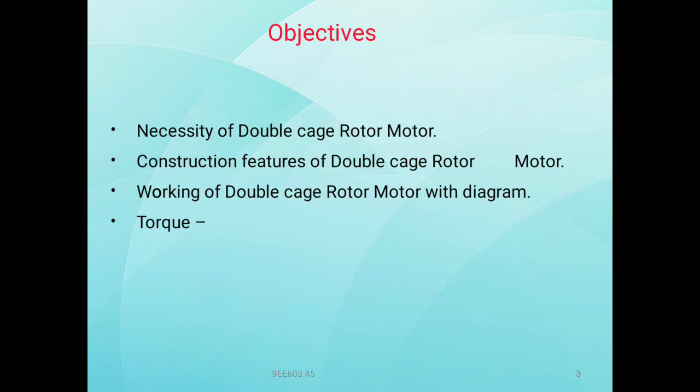The objectives are: necessity of double cage rotor motor, construction feature of double cage rotor motor, working of double cage rotor motor with diagram, torque slip characteristics of double cage rotor motor, and advantages of double cage rotor motor.

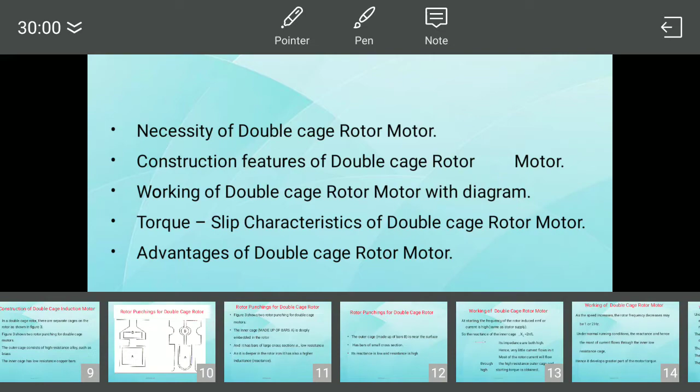Necessity of double cage rotor motor. The main disadvantage of squirrel cage induction motor is its poor starting torque, due to its lower rotor resistance.

So there is no way to insert external resistance as the winding is permanently short circuited.

So here the starting torque is poor, so we have to improve the starting torque. How can we improve the starting torque in squirrel cage motor? There is no way. There is no possibility to improve the starting torque in squirrel cage rotor motor.

So in single cage, in squirrel cage rotor motor, why is the winding permanently short circuited?

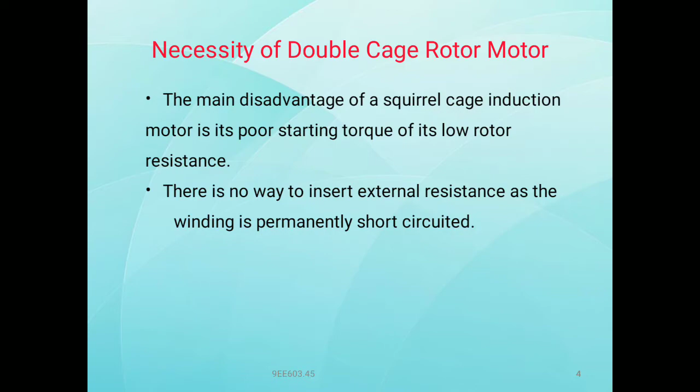Now, no external resistance can be added at the time of starting because its cage is permanently short circuited.

The starting torque of the squirrel cage motors are improved by using double cage rotor. So very important: here the starting torque of squirrel cage motors is improved by using double cage rotor.

So therefore a method of obtaining comparatively high rotor resistance at starting to give good starting torque. It's very important here: comparatively high rotor resistance at starting to give good starting torque.

And low resistance when running, to give good efficiency in cage motors. Low rotor resistance when running, to give good efficiency in cage motors.

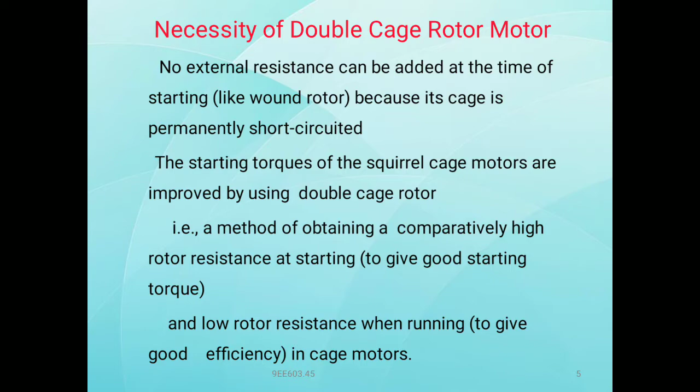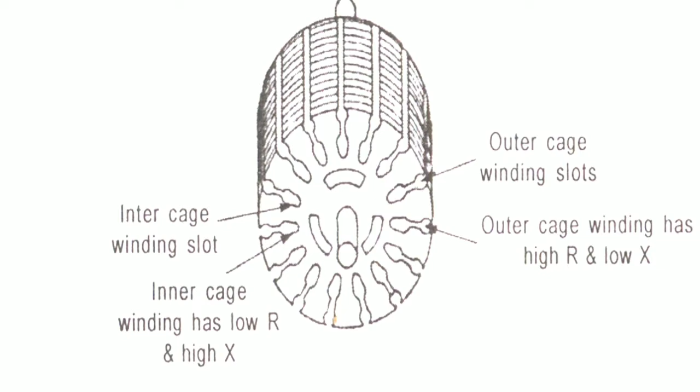So this is the double cage. Here this is outer, this one is inner cage. Here inner cage winding slots.

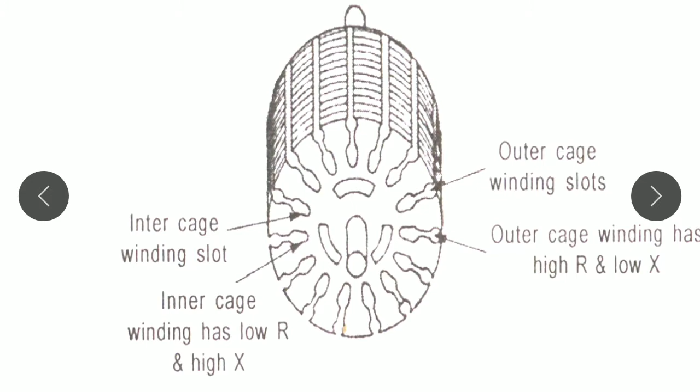Inner cage winding has low R and high X. Low R and high X. Outer cage winding has high R and low X.

So this is the additional cage they are using here, this is the additional cage outer. So why here is the outer resistance high? So it improves the starting torque.

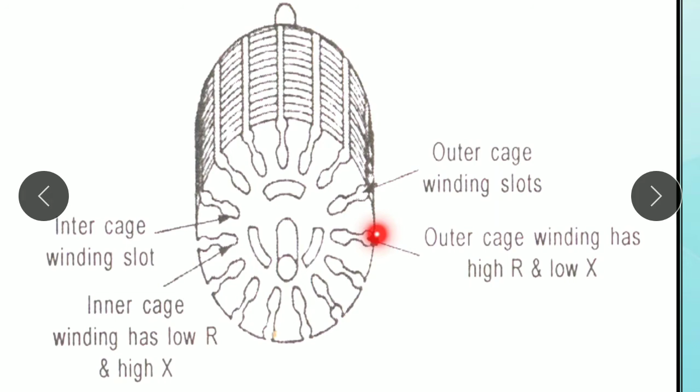Outer cage improves the starting torque, and this improves it at the starting time. Here is the outer cage resistance. Why is high resistance used here?

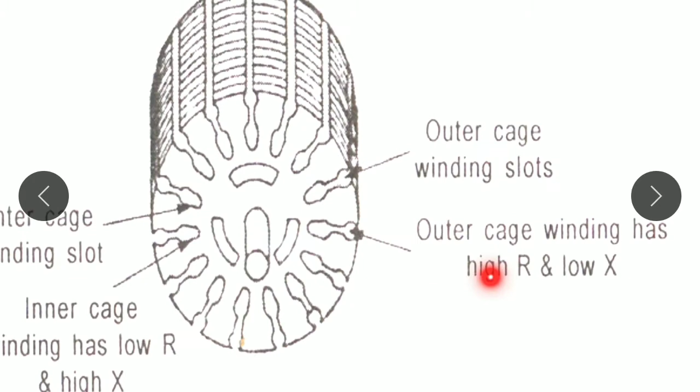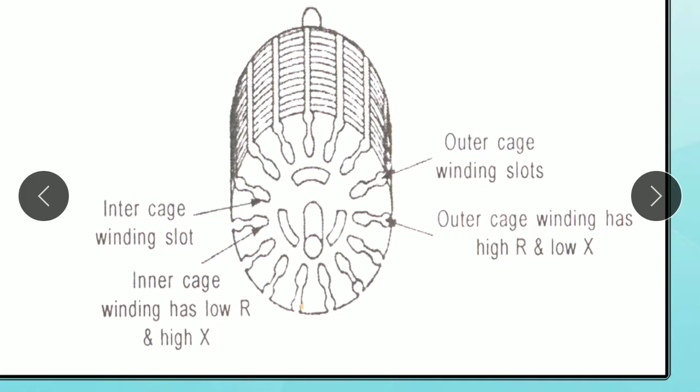Now inner cage, under running conditions, inner cage is working. So low resistance, that means the efficiency is high.

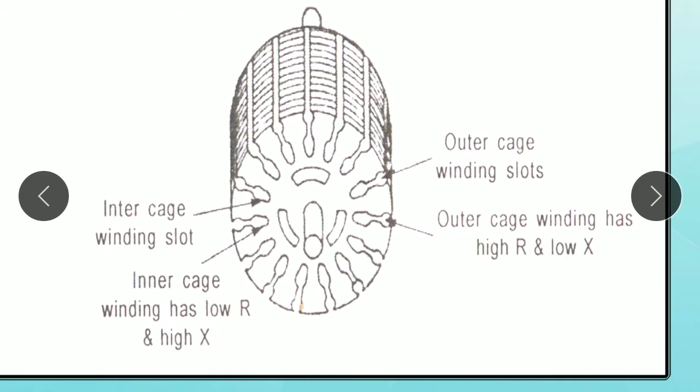So these are the diagrams. See this diagram, see once again carefully.

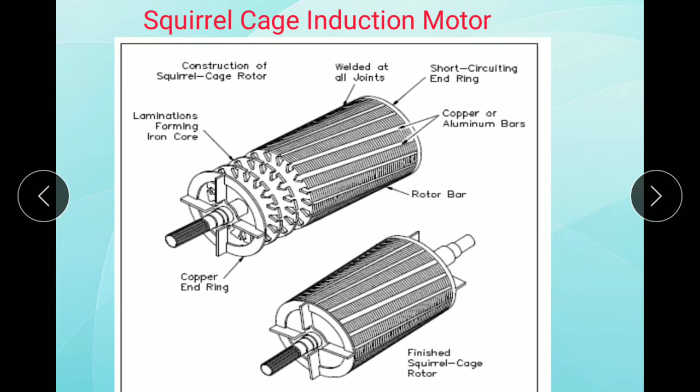Rotor bar, copper end rings, laminations forming iron core, welded at joints, short circuiting end rings, copper or aluminum bars. This is the finished squirrel cage rotor.

The construction of double cage induction motor: efforts have proved that high starting torque in squirrel cage motors can be achieved by using double cage, two independent cage windings rotors. So in double cage rotor consists of two separate cages on the rotor as shown in figure 1 and figure 2.

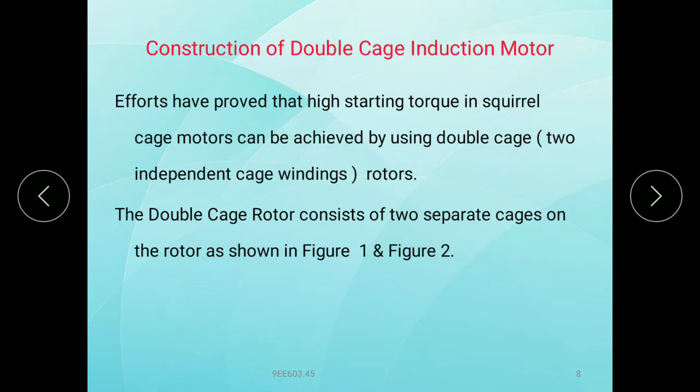Rotor punchings for double cage rotor.

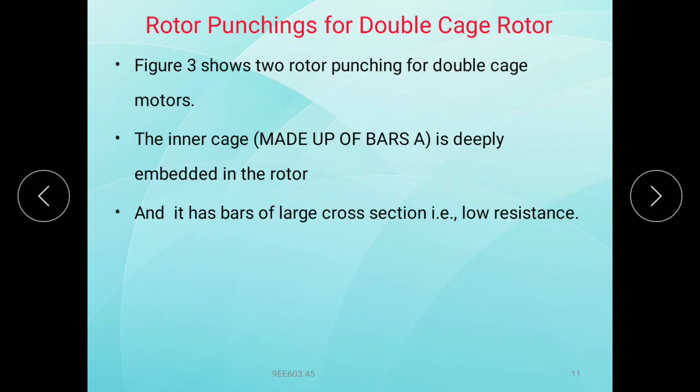Figure 3 shows two rotor punchings for double cage motors. The inner cage is made up of bars deeply embedded in the rotor, and it has bars of large cross sectional area and low resistance. See here, this is large cross sectional.

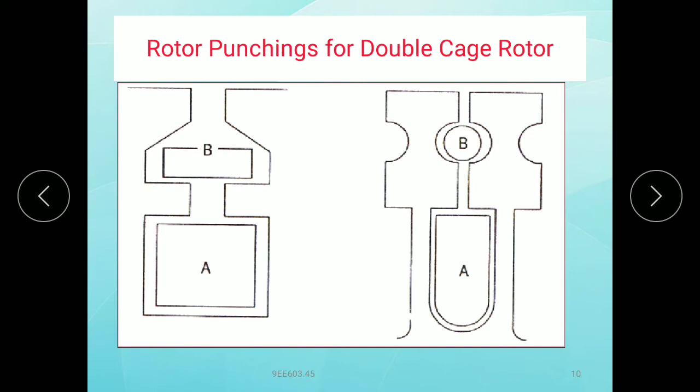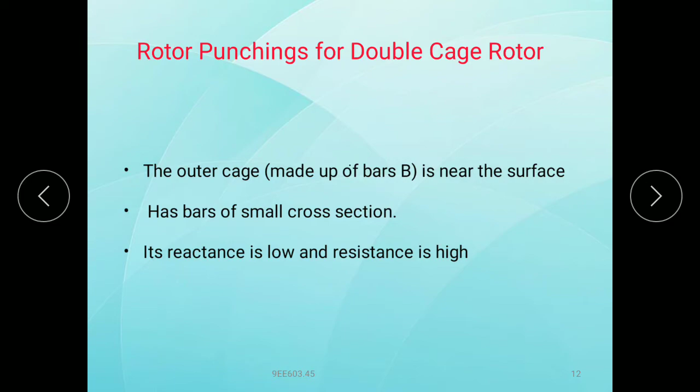Large cross sectional area means when the cross sectional area is high, the resistance of the bar is less. Here the cross sectional area is less, so the resistance is high. The outer cage has bars of small cross section, so its reactance is low and resistance is high.

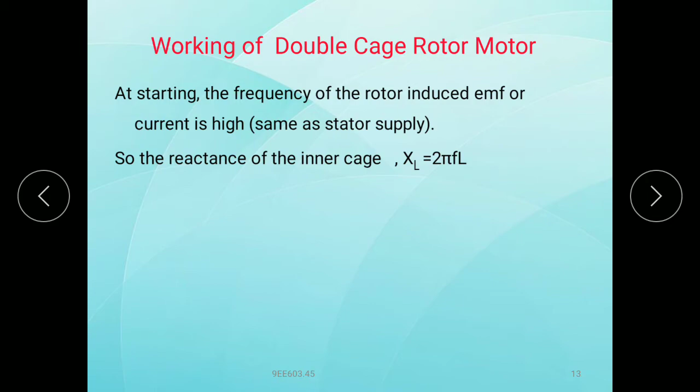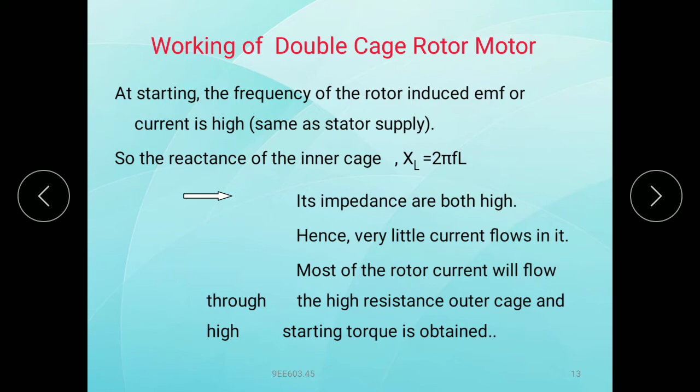At starting, the frequency of the rotor induced EMF or current is high, same as the stator supply. So the reactance of the inner cage, XL equals 2 pi FL, and its impedance are both high. Hence, very little current flows in it. So most of the rotor current will flow through the high resistance outer cage, and high starting torque is obtained.

As the speed increases, the rotor frequency decreases, maybe to 1 or 2 Hz. Under normal running conditions, the reactance decreases, and hence most of the current flows through the inner low resistance cage. Hence it develops the greater part of the motor torque.

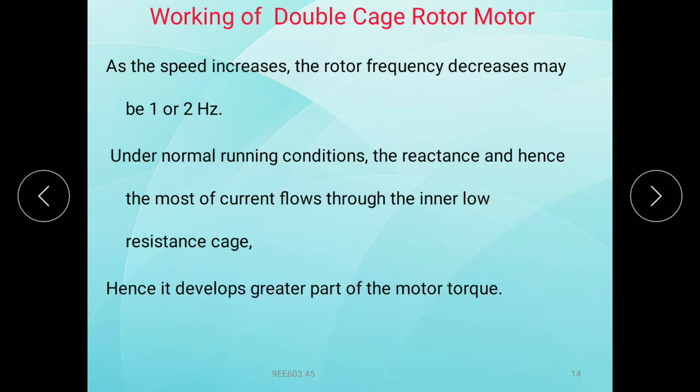Under normal running conditions, the frequency of the rotor EMF is so small that the reactance of both cages can be neglected. The current is carried by the two cages in parallel, giving a low combined resistance. Thus rotor copper losses, I squared R, will not be high, and therefore will not adversely affect the motor efficiency, giving a high efficiency under running conditions.

The outer cage torque is high because of high resistance, while the inner cage has low resistance. So it goes this way, and this combination gives the double cage rotor characteristic.

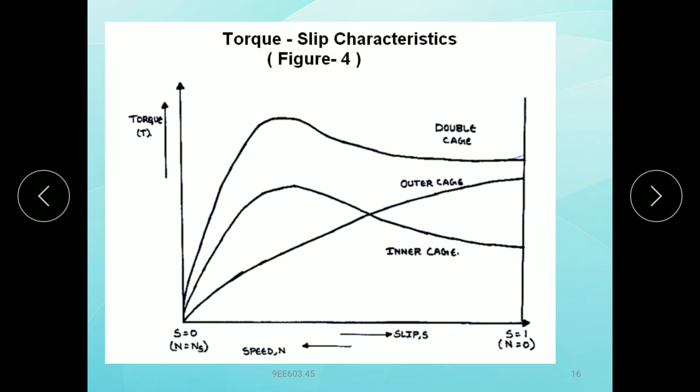When S is equal to 0, N is equal to Ns, the torque will be 0. And when S is equal to 1, N is equal to 0, the starting torque will be high. This is the torque-slip characteristics of the double cage motor, shown in figure 4.

When slip S is equal to 1, a great portion of torque is contributed by the outer cage. During running, the outer cage contributes only a small portion of the total torque.

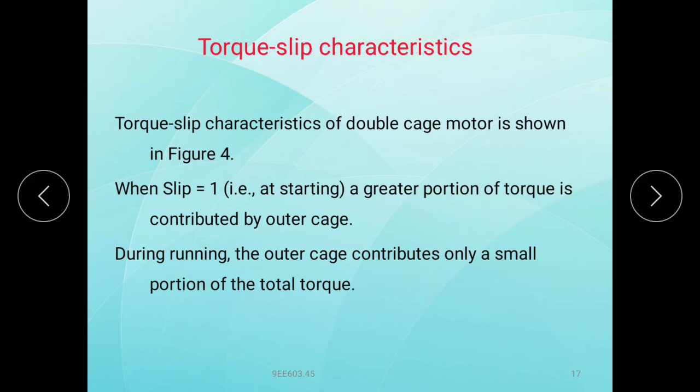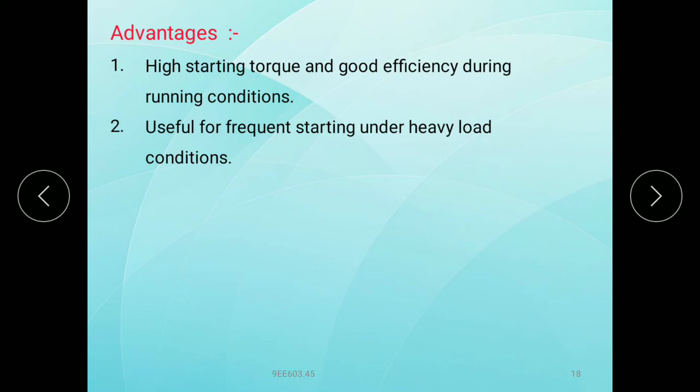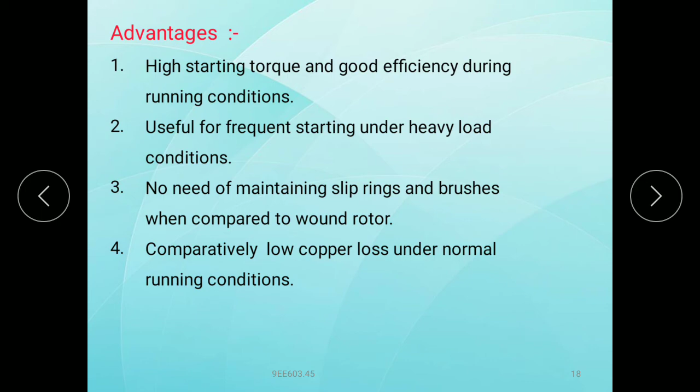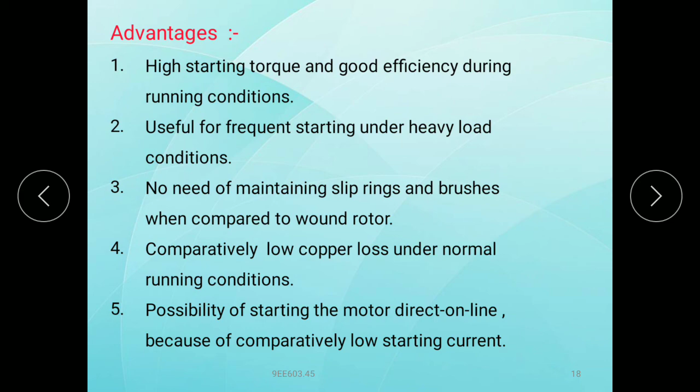Advantages: high starting torque and good efficiency during running conditions, useful for frequent starting under heavy load conditions. No need of maintaining slip rings and brushes when compared to wound rotor. Comparatively low copper losses under normal running conditions, and the possibility of starting the motor direct-on-line because of comparatively low starting current.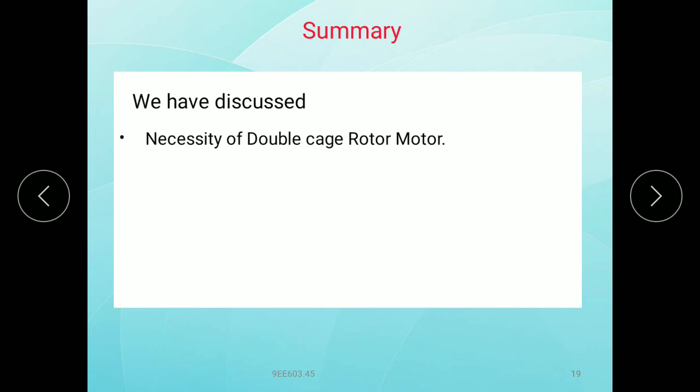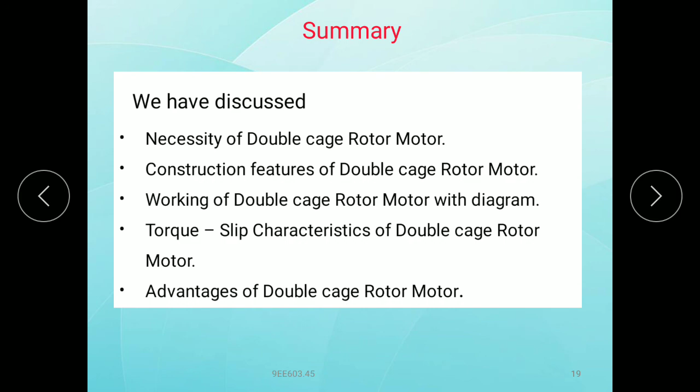The summary is, so we discussed the necessity of the double cage rotor motor, construction features of the double cage rotor motor, working of the double cage rotor motor with diagram, torque-slip characteristics of the double cage rotor motor, and advantages of the double cage rotor motor. Thank you.